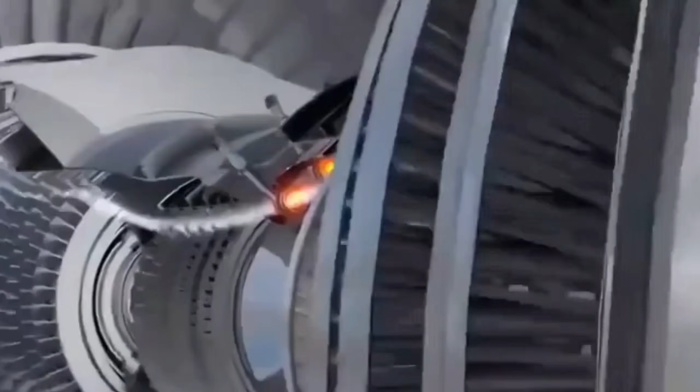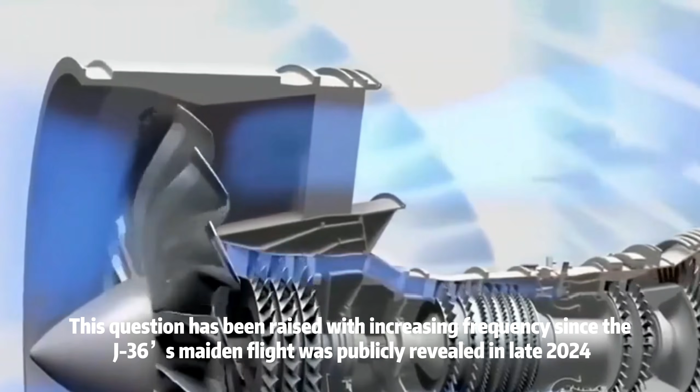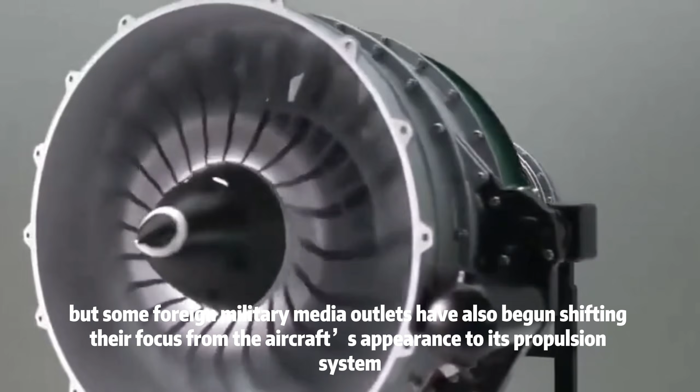If the J-36 engine is ultimately going to be switched from the WS-15 to a variable cycle engine, then what exactly is the purpose of building 4 prototypes all at once? This question has been raised with increasing frequency since the J-36's maiden flight was publicly revealed in late 2024. It is not only being discussed among military enthusiasts, but some foreign military media outlets have also begun shifting their focus from the aircraft's appearance to its propulsion system.

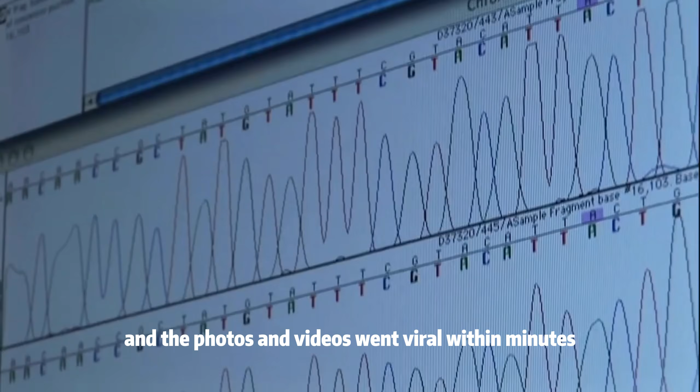On December 26, 2024, a local resident in Chengdu captured footage of an aircraft without a vertical stabilizer roaring past, escorted by a J-20S. The airframe number 36011 was clearly visible, and the photos and videos went viral within minutes. Military observers have tentatively dubbed it the J-36, based on this number.

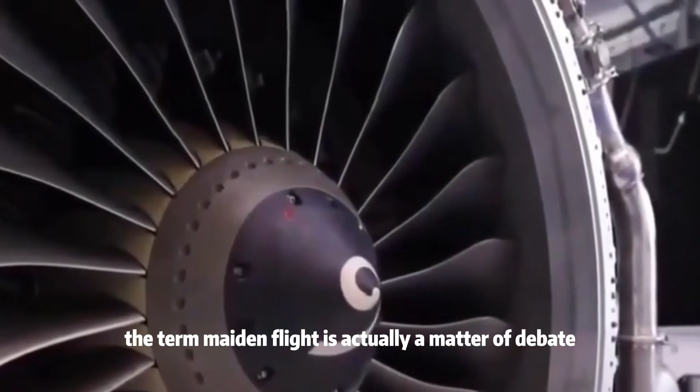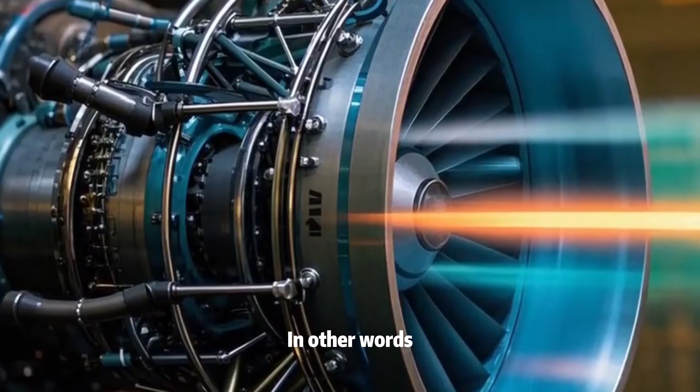However, within the aviation community, the term maiden flight is actually a matter of debate. As early as around October 2021, satellite imagery of the Chengdu Aircraft Industry Group test airfield had already revealed a new aircraft, suspected to be a 6th-generation fighter. In other words, the public appearance in late 2024 was most likely not the J-36's true maiden flight, but rather a public debut after its technical status had stabilized sufficiently.

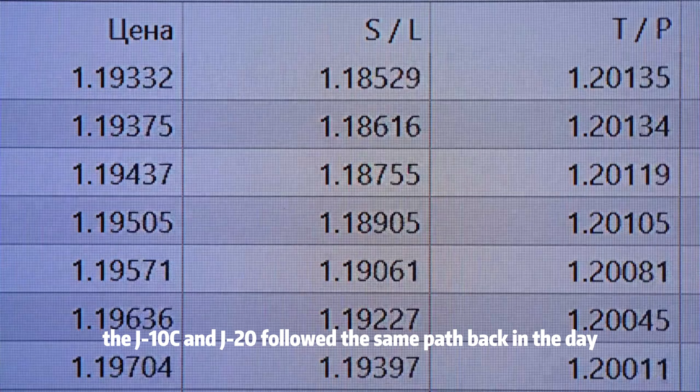This timeline is not unfamiliar. The J-10C and J-20 followed the same path back in the day.

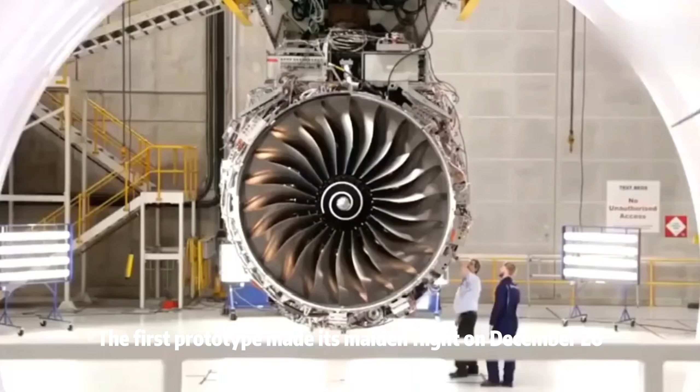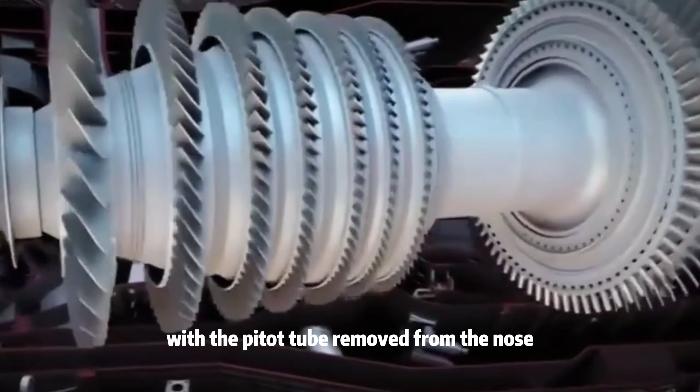From the public maiden flight to the end of January 2026, the number of J-36 prototypes had reached 4. The first prototype made its maiden flight on December 26, 2024. The second took to the skies in Chengdu in late October 2025, featuring a redesigned air intake and angled thrust vectoring nozzles. The third conducted test flights on December 25, 2025, with the pitot tube removed from the nose, indicating that aerodynamic validation was largely complete. The fourth prototype completed test flights on January 30, 2026, featuring additional tail control surfaces for enhanced maneuverability.

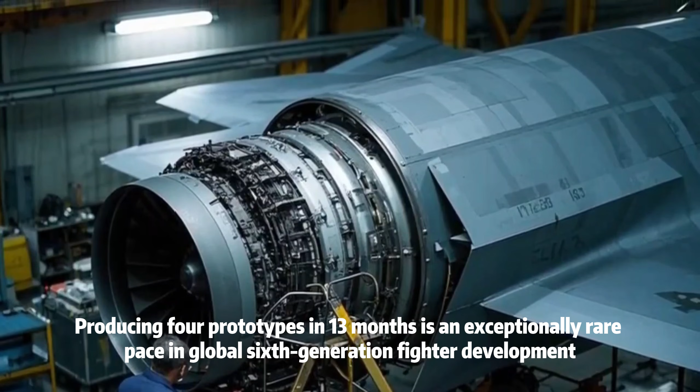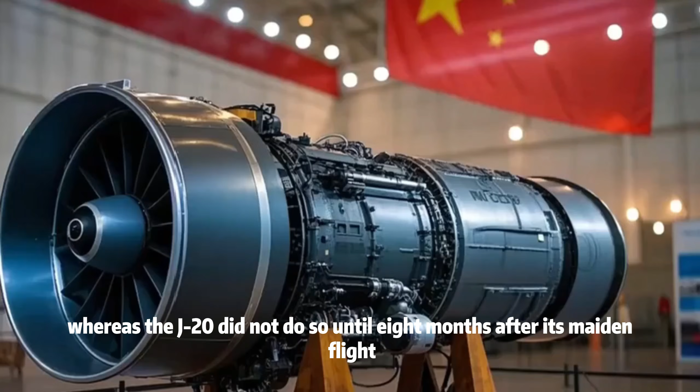Producing 4 prototypes in 13 months is an exceptionally rare pace in global 6th-generation fighter development. The J-36 engaged afterburner during its second test flight, whereas the J-20 did not do so until 8 months after its maiden flight. This suggests that the J-36's technical readiness is far more advanced than the outside world had anticipated.

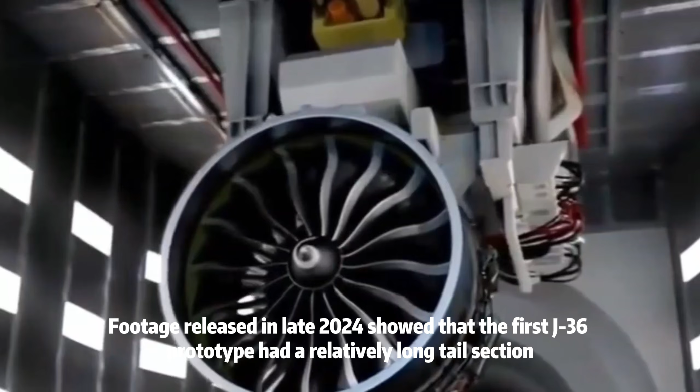Among all these developments, the engine has sparked the most curiosity among observers. Footage released in late 2024 showed that the first J-36 prototype had a relatively long tail section. However, later test flight photos of an improved version revealed a noticeably shorter tail. The reason for this change likely stems from the technical maturation process of the WS-15 engine.

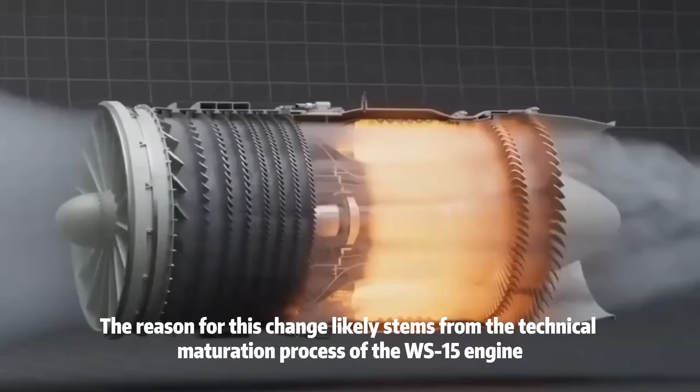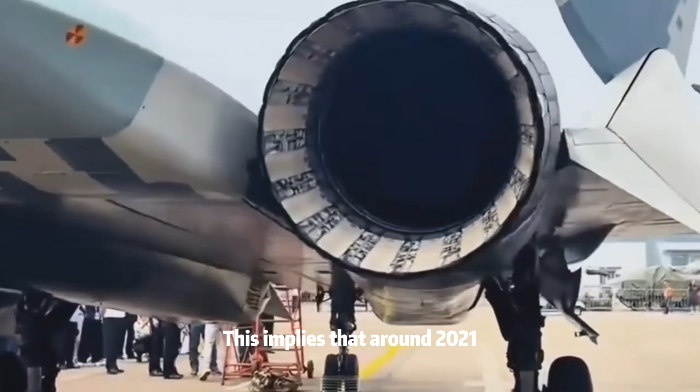In July 2018, academician Liu Daxiang, an expert in aero propulsion, stated during a public lecture that the 4th-generation low bypass ratio aeroengine project was progressing smoothly and would be finalized within the next 3 to 5 years. This implies that around 2021, the WS-15 was still in the final stages of development. It is standard practice in the aviation industry to prioritize the most technically mature and stable engines for the maiden flight of a new aircraft model. In 2021, the only mature engine suitable for the J-36 was the WS-10 series.

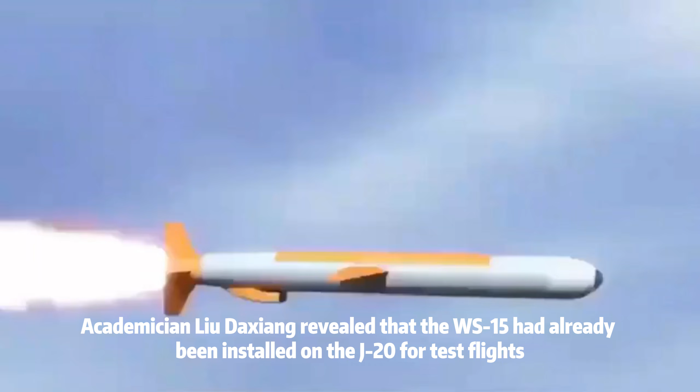The British magazine Aviation Week also speculated at the time that the J-36, which was in the testing phase, was equipped with the upgraded WS-10C. The real turning point came in 2023. In December 2022, academician Liu Daxiang revealed that the WS-15 had already been installed on the J-20 for test flights. In 2023, photos of the J-20 undergoing test flights with a new engine, featuring a black exhaust nozzle, were leaked, and it was widely believed that this was the WS-15.

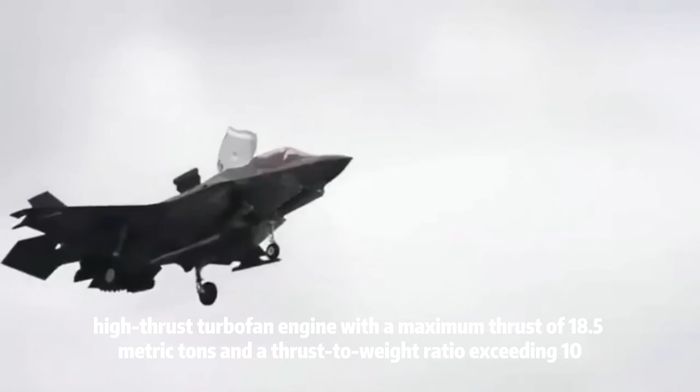The WS-15 is a 4th-generation low-bypass, high-thrust turbofan engine with a maximum thrust of 18.5 metric tons and a thrust-to-weight ratio exceeding 10, outperforming the F119 used by the F-22.

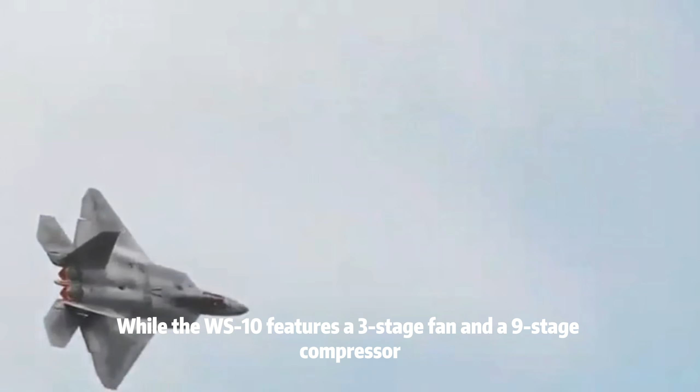Returning to the question of why the J-36's tail section is shorter, the WS-15 is more compact than the WS-10. While the WS-10 features a 3-stage fan and a 9-stage compressor, the WS-15 has a 3-stage fan and a 6-stage compressor, eliminating 3 stages of blades. With the engine length reduced, the tail naturally becomes shorter.

However, this creates a new problem. A gap is left in the middle of the tail, which could adversely affect radar stealth performance. The designers must have been well aware of this. So why do it this way? The most reasonable explanation is that the WS-15 is not the J-36's final target engine, but rather a transitional solution.

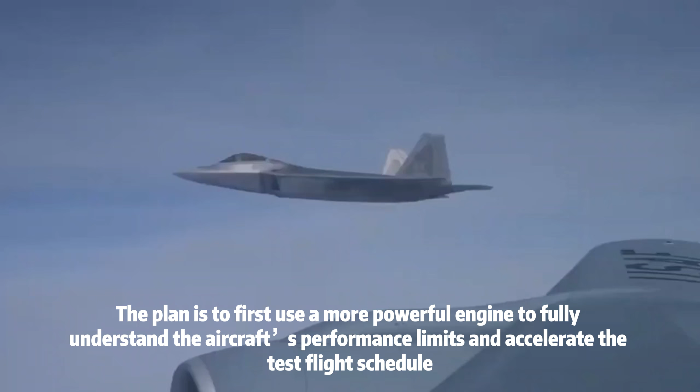The plan is to first use a more powerful engine to fully understand the aircraft's performance limits and accelerate the test flight schedule, then perform the final integration once the true target engine is ready. For the J-36, the WS-15 is akin to the WS-10 for the J-20, both are threshold-level engines.

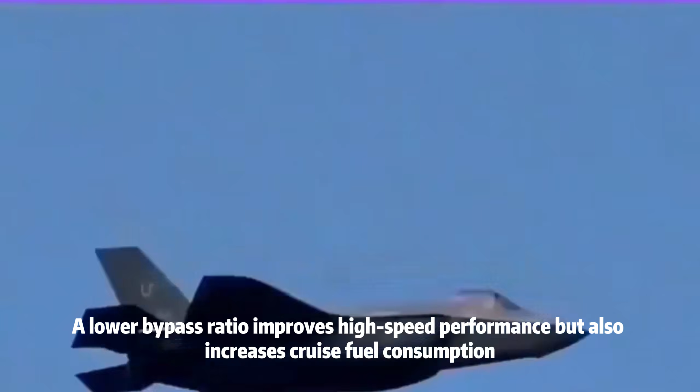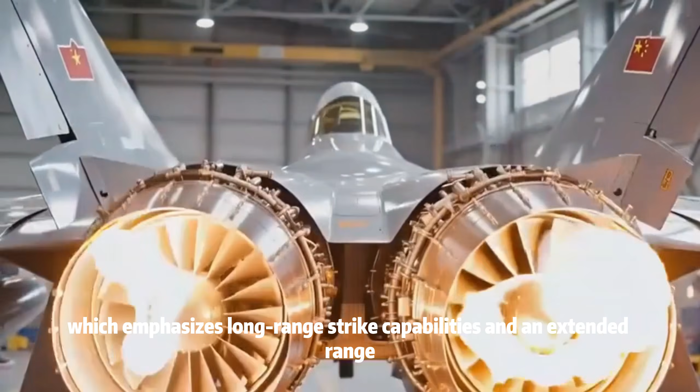Another key factor is fuel consumption. The WS-15 has a relatively low bypass ratio, similar to the F119 at around 0.3. A lower bypass ratio improves high-speed performance, but also increases cruise fuel consumption. For a platform like the J-36, which emphasizes long-range strike capabilities and an extended range, high fuel consumption means a reduced range. You cannot have both thrust and range. This is not the optimal solution.

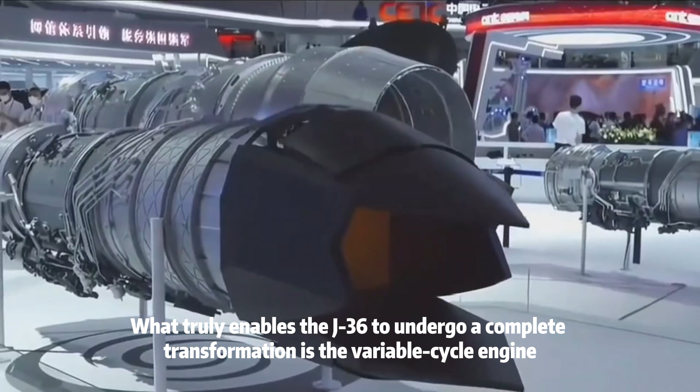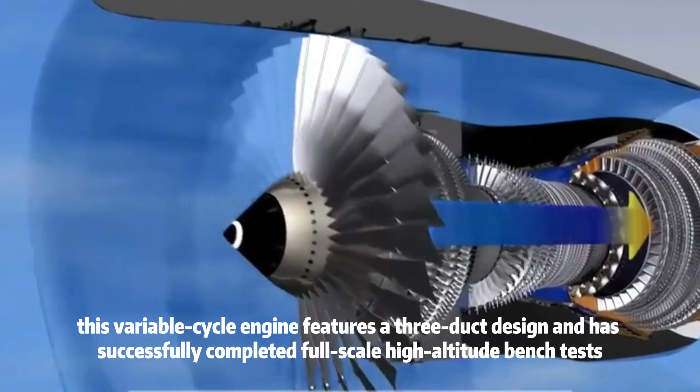What truly enables the J-36 to undergo a complete transformation is the variable cycle engine, developed by the Institute of Engineering Thermophysics at the Chinese Academy of Sciences. This variable cycle engine features a 3-duct design and has successfully completed full-scale high-altitude bench tests. Test data shows that during high-altitude tests simulating Mach 4, the engine switched modes smoothly, with the transition taking less than 0.5 seconds.

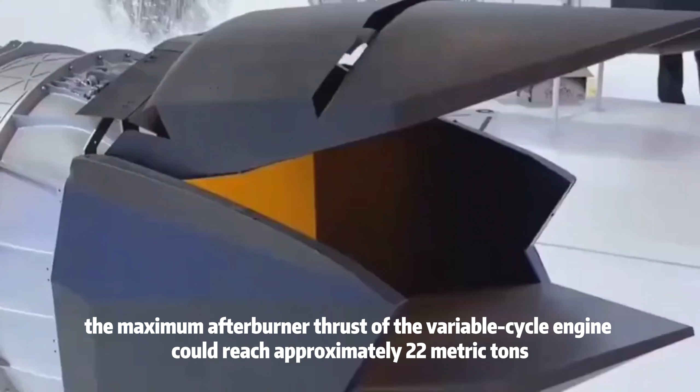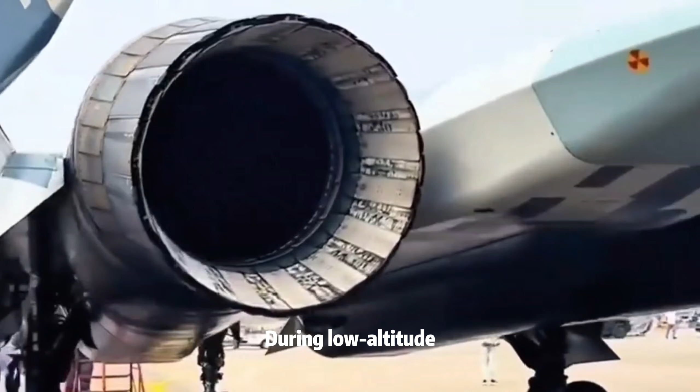Compared to fourth-generation engines, fuel consumption is reduced by 37.5%, while specific thrust is increased by 47%. Based on estimates using the WS-15 as a reference, the maximum afterburner thrust of the variable cycle engine could reach approximately 22 metric tons. The advantage of the variable cycle engine lies in its ability to adjust to the most suitable equivalent bypass ratio for different flight conditions. During low-altitude, low-speed cruise, the bypass ratio is increased to save fuel. During high-altitude, high-speed combat, the bypass ratio is reduced or even switched to turbojet mode to maximize thrust.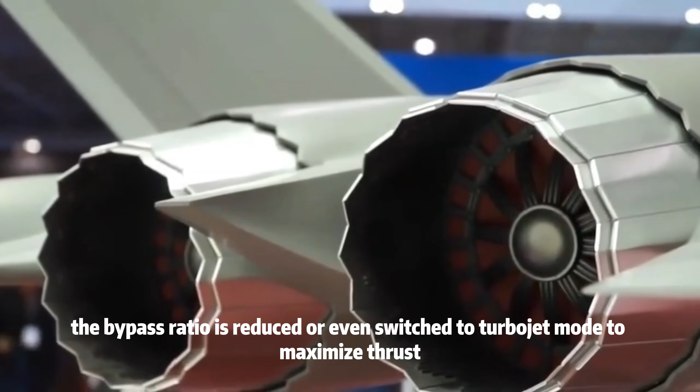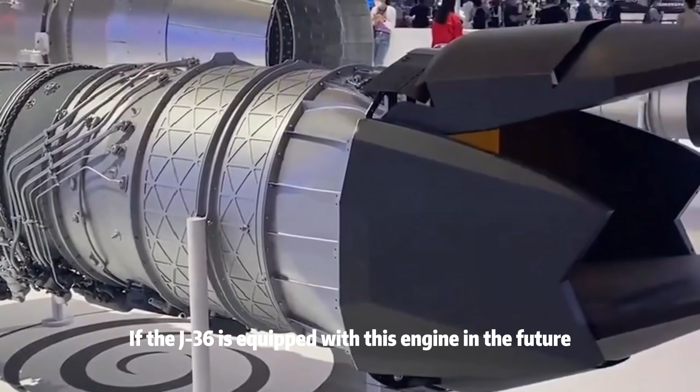The WS-15 belongs to the fourth generation, while the variable cycle engine belongs to the fifth generation. This is a genuine generational leap. If the J-36 is equipped with this engine in the future, its range is expected to increase by 60% and its maximum speed is expected to reach Mach 4. Its combat radius could be extended from approximately 2,500 kilometers to around 4,000 kilometers.

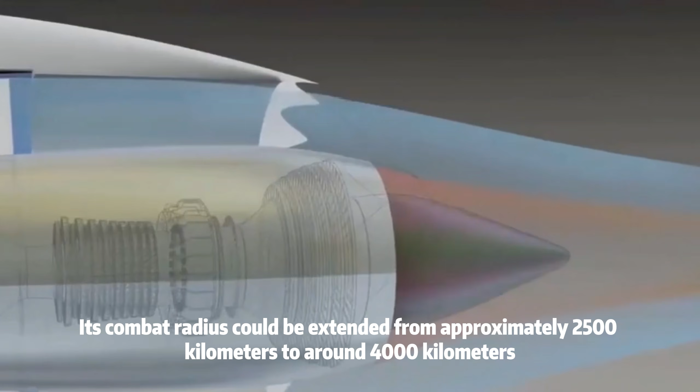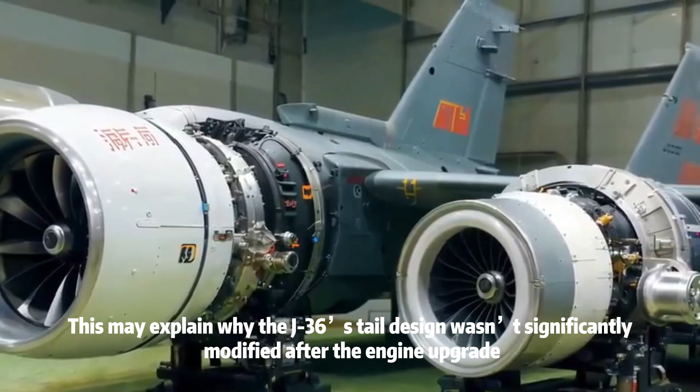Several details support this assessment. Based on leaked structural designs, the variable cycle engine has a similar number of stages in length to the WS-10 series. This may explain why the J-36's tail design wasn't significantly modified after the engine upgrade. Space was reserved for a more compatible engine. Once the variable cycle engine is installed, the gap in the tail section will be perfectly filled.

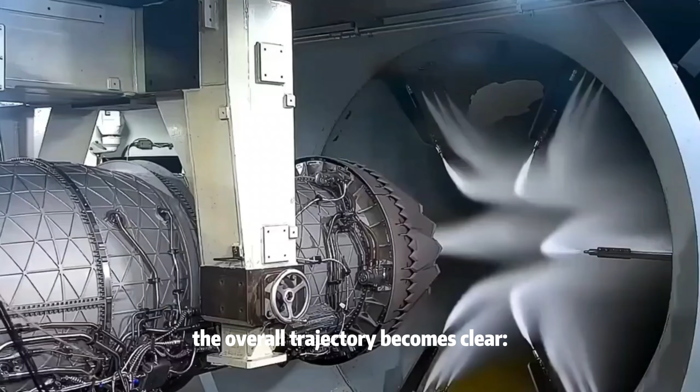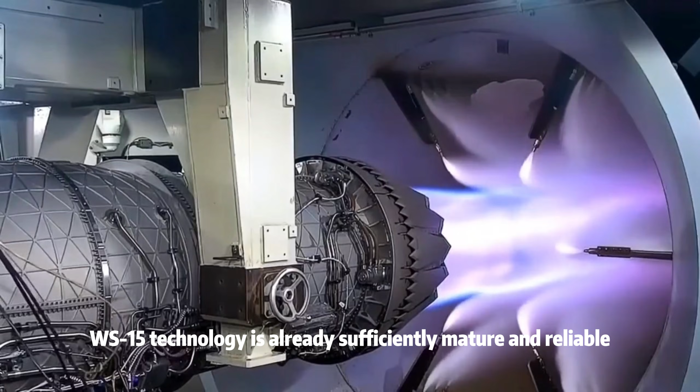If we examine the evolutionary path from the WS-10 to the WS-15 and on to the variable cycle engine, the overall trajectory becomes clear. The WS-10 is the starting point, the WS-15 is the transitional phase, and the variable cycle engine is the ultimate destination. WS-15 technology is already sufficiently mature and reliable, making it entirely feasible for high-intensity test flights.

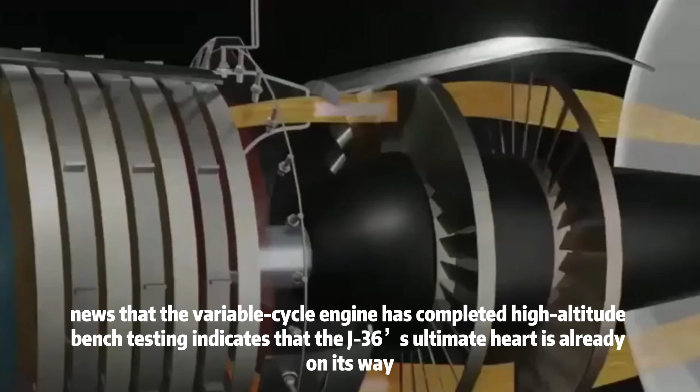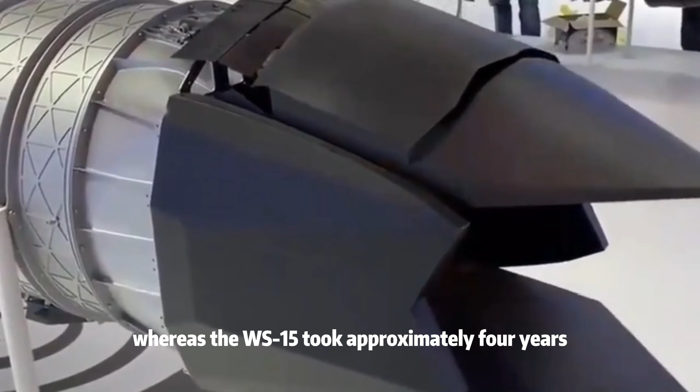Meanwhile, news that the variable cycle engine has completed high-altitude bench testing indicates that the J-36's ultimate heart is already on its way. China completed the full-scale validation of key technologies for the variable cycle engine as early as 2018, with final certification expected between 2026 and 2028. Looking back, the WS-10 entered the in-air test phase just 1 year after completing high-altitude bench testing, whereas the WS-15 took approximately 4 years. No one can say for certain how quickly the variable cycle engine will progress, but judging by the completeness of the test data, the time frame is rapidly narrowing.

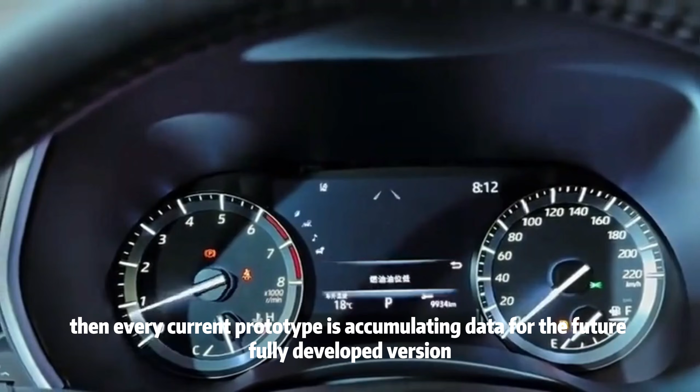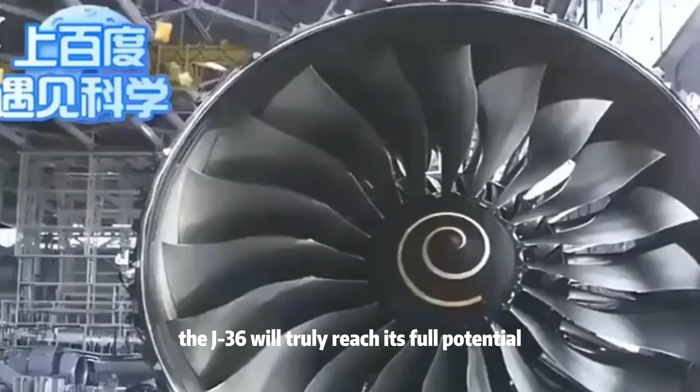The progress of the J-36 test flights is itself validating this assessment. If the WS-15 is indeed not the final design, then every current prototype is accumulating data for the future fully developed version. Once the test flight program is largely complete and the variable cycle engine has finished all its testing procedures, the J-36 will truly reach its full potential, flying farther, faster, and with lower fuel consumption.

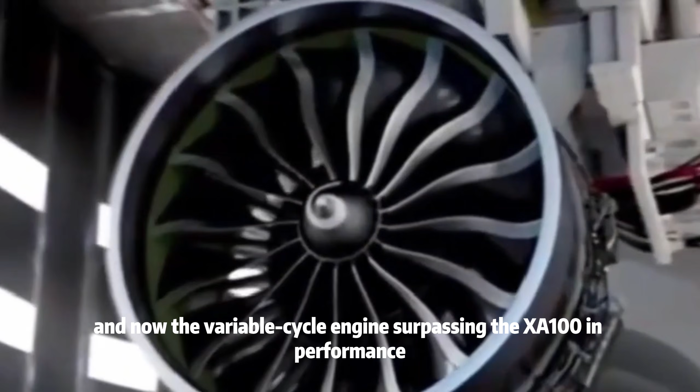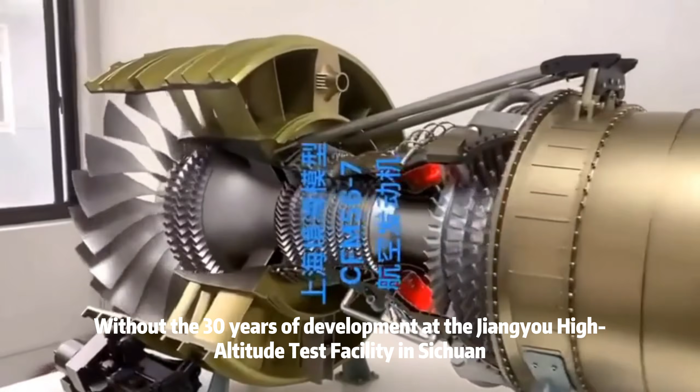From the WS-10, achieving self-reliance and control, to the WS-15 matching the performance of the F119, and now the variable cycle engine surpassing the XA100 in performance, every step is reshaping people's original perceptions of this field. Without the 30 years of development at the Jiangyou High-Altitude Test Facility in Sichuan, none of the subsequent engines would have been possible.

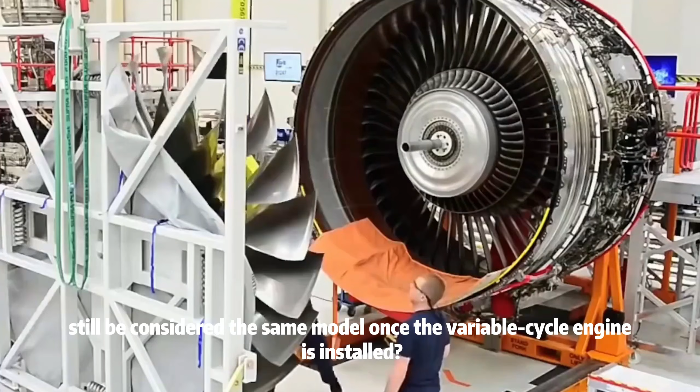So the question returns to where we started: if the ultimate goal is truly the variable cycle engine, will the 4 current prototypes, equipped with the WS-15, still be considered the same model once the variable cycle engine is installed? Or does this mean that the J-36 we see today is actually far from its final form?